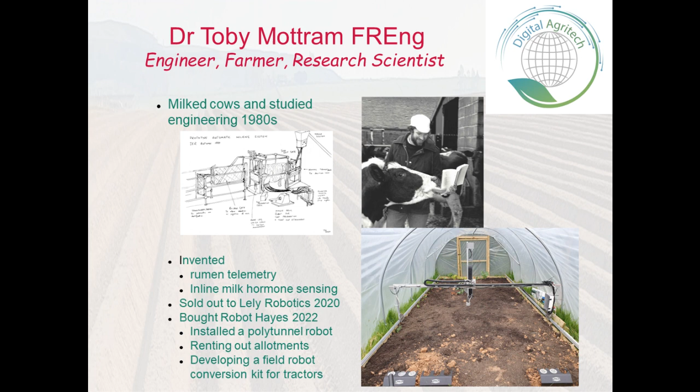So just to go back to the early days, I wrote the control software to get the cow in and out of the milking parlour, which was basically on an MS-DOS desktop machine with lots of wires, some gate sensors, and some strain gauges to measure the milk flow. Mike Street and his guys worked on a much faster Motorola platform to do the robot arm control, and we used to measure where the cow was in the station by an LVDT.

So it was all very analog, but it worked, and we sold that on to De Laval, and they went away and commercialized it from about 1997.

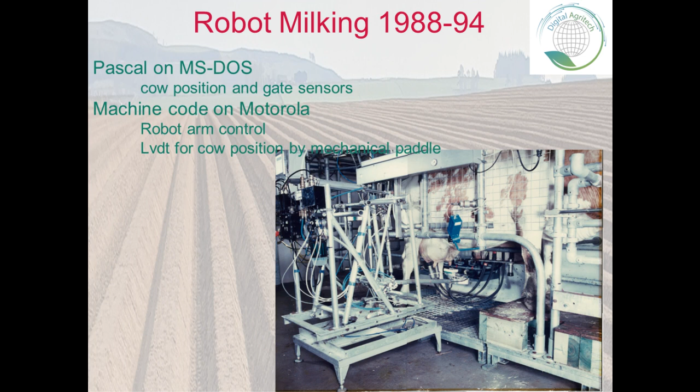One of the things worth remembering is that it takes, in effect, 10 years to get a complex product from an idea to market. And even now, 25, 30 years on since they launched it, there's still only about 10% of the cows in the world being milked by robot. The rest are still in very conventional systems, and there's still millions milked by hand. So the penetration is coming, and it's a big market, but it takes a while for farmers to change sometimes.

Then I moved into cow health monitoring, and I was actually rung up in the late 90s by a well-known company called Pfizer, who aren't in agriculture anymore, but they had some new product that was going to change the pH of the cow, because for years the vets had been saying the pH in the stomach is low and the cows are ill and it's a problem.

So we built a little wireless IC. In those days it was pretty large actually, about 30 millimeters across, but we managed to get that down a cow's throat. Later on we got much smaller ones. This batch you can see is actually the last batch I made in 2021 before I sold the company, and that transmitted at 433 megahertz with a very simple protocol.

We had a USB receiver, which we started off with a laptop, and then somewhere around about 2007 we thought, hold on, we can do this on a phone. So there was a lot of Java coding, and one of my student helpers there was actually downloading data off a cow, and that's how it worked.

But it was always going to be a research organization thing, because what we proved very quickly was that the rumen pH goes up and down like a yo-yo depending on what the cow's being fed. And yes, you can affect it by feeding, but almost all of it was down to the humans involved in feeding the cows, not in the actual formulation of the rations. That was pretty well organized.

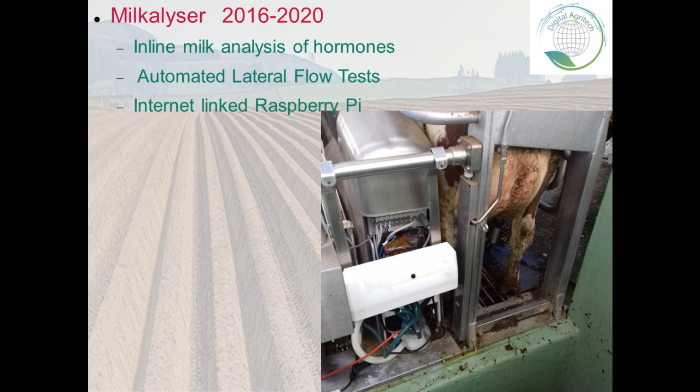In those days we used a Raspberry Pi, and I realized that the company who bought us out, Lely Robotics, one of the market leaders in robot milking, their head of development said, 'I like it, but I don't want to use a toy computer.' And I thought, oh God, here we go. Everything had to then be translated into a Windows-based system, and they put in a much more expensive camera, and then said, 'It's not cost effective.' So big companies don't always know as much as those at the front end.

Okay, so that's my whinges out of the way. Let's talk about the markets for agricultural software.

Well, obviously, government has had software for a long time, because they have to give out money and they need to record things. Also, big tech companies and supply chains - to be honest, I know nothing about that side, but I'm sure there's all the usual large company issues involved, legacy software and all the rest of it.

So let's talk about farm accounting. The first piece of software I saw on the farm was bought by my boss back in 1981 or 82, which was Farm Plan, an accounting software based on sales receipts and invoices.

It struggled because there's still many cash transactions in farming - you'll often go to some meet of farmers and there's a deal to be done, and they'll whip out a wallet full of £20 notes rather than do it through the books. That's one of the issues in farm accounting, but that's now pretty well understood, and half a dozen companies have that market stitched up.

What used to be frustrating though is the farm accounting never linked much to the farm management software, which in the early 80s - I was milking cows in Somerset as a herd manager - we used to record everything on paper sheets, then go down to the office and type it all in, and work out cow milk yields and so forth.

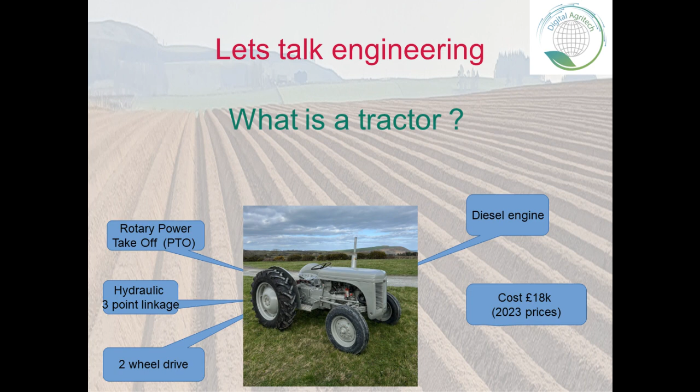4-wheel drive only really became popular in about the 70s and 80s, and now even small, cheap tractors are 4-wheel drive. The machine, actually, I think it cost about £500, which is £18,000 in today's prices. But now, moving on however many 70-odd years, you can now buy one manufactured in India - but not rubbish at all, it's a Yanmar company, built very well - costing almost half what they used to, but with a lot more features.

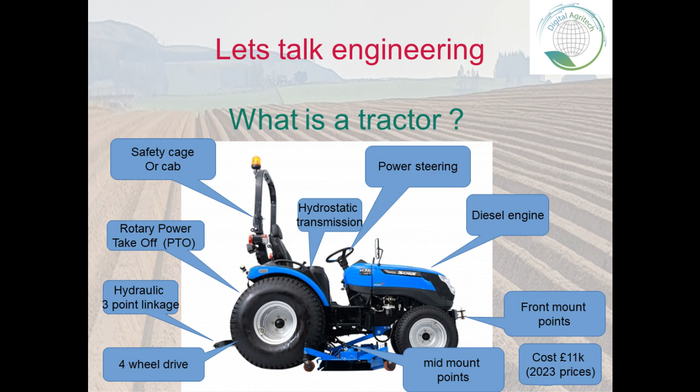Tractors were dangerous things, so they have to put cages and cabs on them. You've still got rotary power, but you've now got 2 hydraulic outputs up the back to provide pressurized oil to drive machines. You've got 4-wheel drive as standard, mid-mounting points for implements, front mounting points for implements, power steering, and, from my point of view, hydrostatic transmission - great, we just need to switch some valves to make the thing go faster and slower.

No one said a word. I'm quite happy to continue.

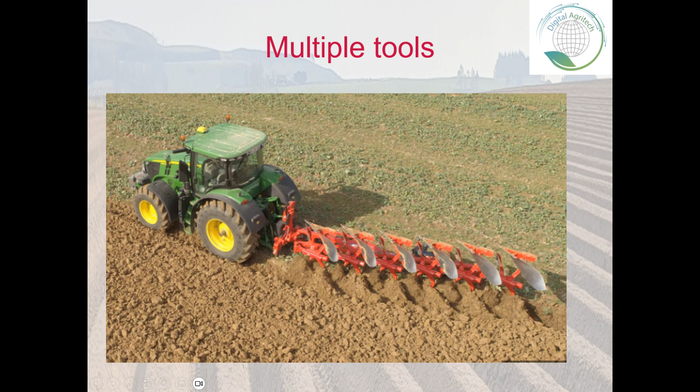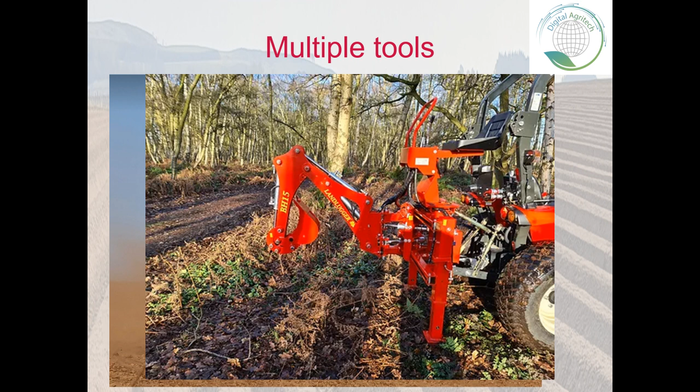Right, so let's talk about the tractor now as a digital machine. This has been creeping in gently over years. I think the big revelation was in '91 in the first Gulf War, when American tank commanders were buying GPS systems.

So that they could precisely locate themselves and call in airstrikes to exactly where the Air Force could find them—well, not find them, but find the other guys. And that in tractors has led to auto steer.

So you just set the thing to drive down a straight line that's coming from your precision location system, and more sophisticatedly now, at the end of the road the machine will actually say, okay, I've got to the end of the headland, and we'll just do a turn and come back down exactly in the correct line on the next set of passes.

But as you then get into other devices, you get into a thing we call the isobus, which is ultimately a CAN bus, but for agriculture. And that now has a feature called tractor implement management.

So let's say that seeder box that we were looking at, it says, oh, I'm sowing this particular seed, and the guide wheels need to turn at 3 meters a second or whatever some number is. So it then controls the speed of the tractor.

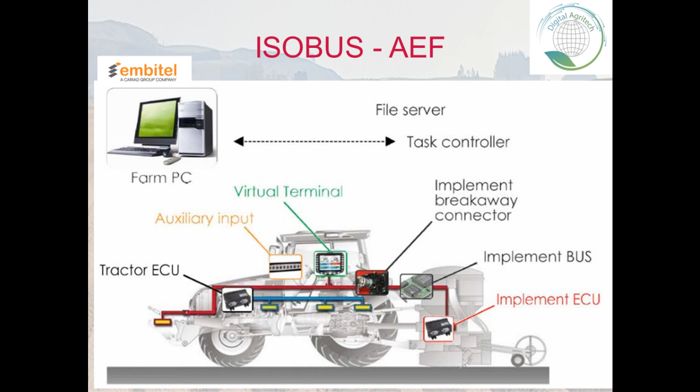And then each of these electronic implements - this is a seed box by the look of the drawing - you've got a bus inside with an electronic control unit, because for example, across this machine you might have a dozen seed boxes all releasing seeds, and they'll all be in electronic contact with the ECU. So that's the ISOBUS. It's a voluntary thing.

So now we're getting on to seriously smart implements. This is a machine called a RoboCrop, which is a hoeing machine for organic vegetable production. It's been developed by a couple of old friends of mine from Silsoe, and they sold the concept to Garford. So you can buy a RoboCrop from Garford.

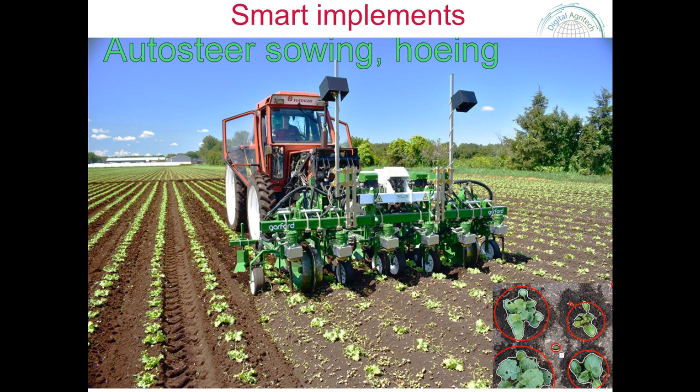And you think the military's got technology - hey, this is farming. So yeah, when the military starts shooting down missiles with lasers, you'll know, well, they copied it off a farm. But these machines, I have to admit, I've seen them working.

There's a hell of a lot of noise because they're running a couple of diesel generators to run all the servers that have to scan across maybe 4 meters, identifying all the plants, powering the lasers, zapping, and so on. So they move across the field at a slow walking pace, but no one wants to hand weed rocket, and weeds grow - they don't care what you're sowing, the weeds will be coming.

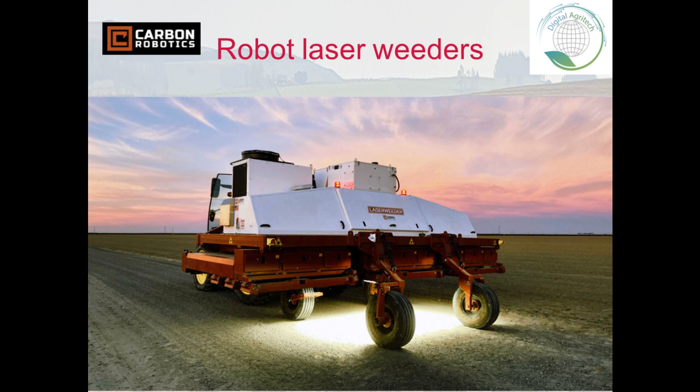So this is quite an interesting new development. There's a couple of companies - this is Carbon Robotics, there's another one called Helix. So yeah, you want to join those intelligent machines together.

So AEF organise what's called a plug fest, where they get everybody - tractor manufacturers, implement manufacturers - together, and it costs about €3,000 to be a member of AEF. So it's not something you do as a startup in the first week, but very quickly you need to be getting involved, and you can just buy the spec anyway - you don't have to go to one of these things to understand the plugs. But if you've got something new, and there will be lots of new stuff coming through, then you'll need to go to one of these and tell them, our data is formatted this way, and we have to do it that way because the only server that will run this technology is such-and-such, that type of thing. So there's a couple of these a year in Europe, and I think there's one in the States every year as well.

So let's move on to what people call autonomous tractors.

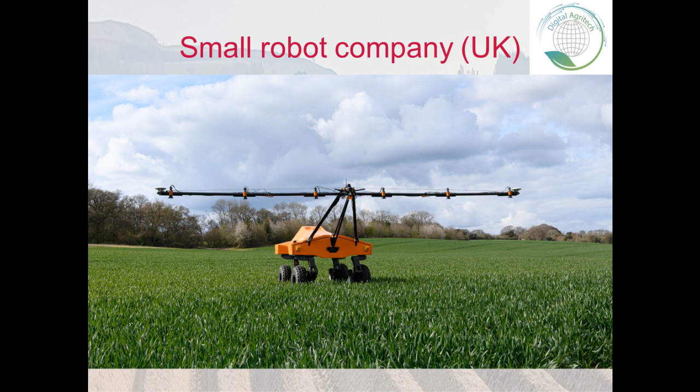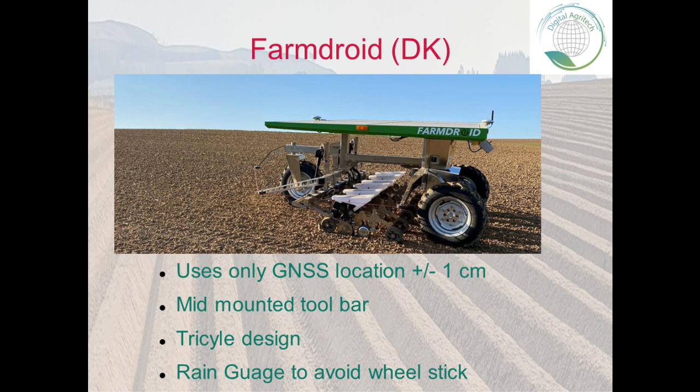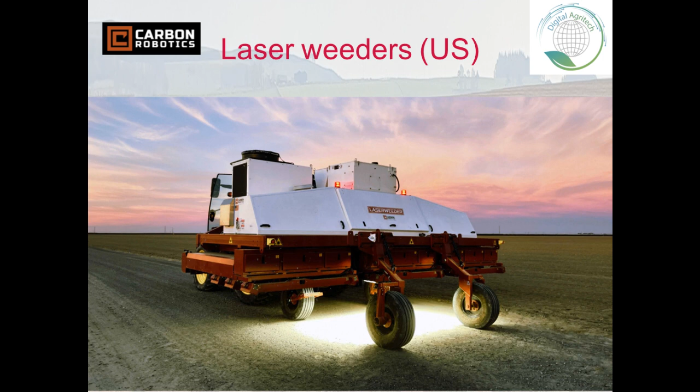The Carbon Robotics laser weeder comes either as something you put on the back of a big tractor, or it comes as self-propelled. I was talking in California, and these guys were saying the investors think it has to be an autonomous robot, whereas actually, once they get it stabilized, it's just another tool you put on the back of a tractor, which has already cost you £100,000. Why would you pay for someone to build another front end tractor just to drive this thing around? That's the logic of many farmers—I've already got a tractor which will do 10 things, why do I want a machine that costs $500,000 and only does one thing? We'll see how that pans out. But I still think the tractor has a huge future, as an autonomous style vehicle.

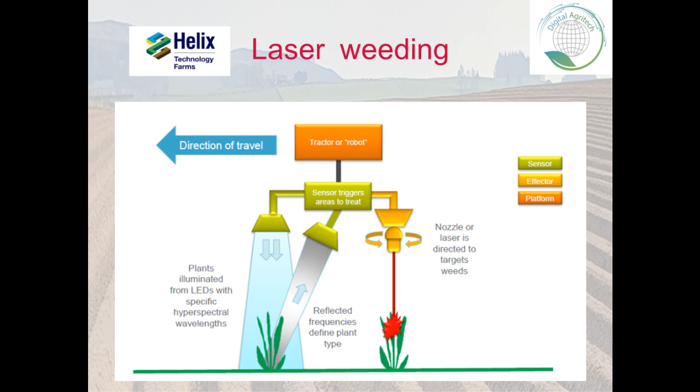So let's come on to some of the practical issues where you've actually got these. The point I'd make is these are very complex machines we're getting into. You've got navigation, machine control, software trying to identify plants, controls of lasers. So there's a lot of things that could go wrong.

They tend to be quite a niche machine. There's only so many people who produce asparagus in the UK, maybe 50. So if you're selling an asparagus picking robot, you haven't got a big market, and the nearest place you'd find someone else to do it would be a particular area of France, because these crops tend to be grown around the marketing distribution channels and particular soil types that grow a particular crop. So be aware of that - this might be a long way to the next group of farms who'd have one of these specialist machines. Rocket, again, is very much a North Italy type product.

You've got software interfaces which go via physical plugs. In my experience, if you're going to have an issue - oh, my machine's not working, what is it? - you're going to end up having to go around and test the physical plugs, because sooner or later you'll find someone's trodden on one while climbing over the machine, or it's been hit, or a piece of bird shit has landed on it. You've got all sorts of things that can go wrong with physical plugs. Unless you turn up on a farm and the machine's not working, you'll slowly find the machine's probably not being used in the way it was intended. Anyway, these things happen.

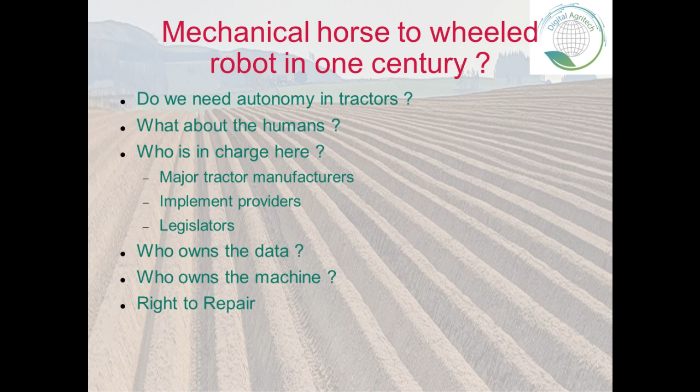Then we've got the issue of who owns the data and who owns the machine, and have you got a right to repair it when it breaks down? Have you a right to get into the software and hack it? Because farmers will do that.

And we've already run into serious issues in the States because John Deere said, no, if you don't pay the software license, the machine switches off, and that's that. So people then jumped up and down and said, that's the whole concept. You bought my tractor. Why should anybody else be able to stop you using it?

So already, and this is very hot news, there's 4 US states now in 2023 that have just enacted a right to repair, which basically means the right to get into the software, whether it's by an independent contractor or the farmer himself. So there's already 4 states, and it's specifically for farm machinery. So that's quite an interesting thing.

I don't know what our government's up to, but I think they're probably more interested in protecting Taylor Swift's digital rights than worrying about tractors. So a little bit of politics there, but hey.

Now, you asked about Internet of Things. This is one of the latest things from John Deere this year, is that up until now, you've used a USB stick to go around and set all the machines to be on the same page. They're now into what their latest piece of software is called Data Sync.

So let's say we've got 3 pea vining machines working in the east of Scotland this summer, all synced together through this new Data Sync software, which will tell them what each machine is doing, where it is at any given time, so that at least they'll avoid colliding with each other. Mostly they're actually just recording the amount of peas they got on board and calling up the trucks to take it away. But that's where we're going with this, is total sync and integration.

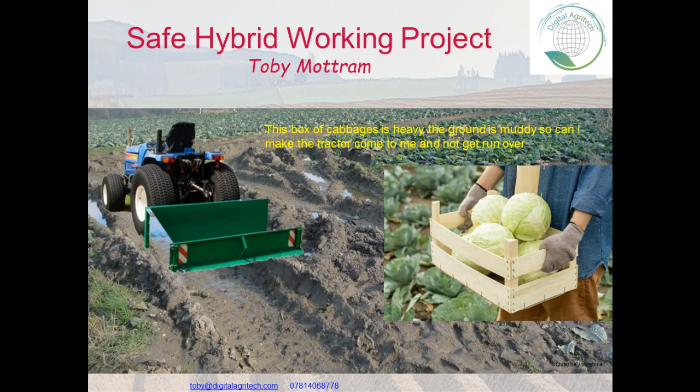So I'll just slip back tonight. There you go, you've got a hand up from Martin who wants to ask a question by the look of it. Sure.

So you're covering the safety aspects to do with people not being mown down when they're walking in front of something, or animals. I was just wondering about the employment aspects. With other walks of life we're concerned now - will technology put us all out of work, or will it mean we're freed up to do other things? So I was wondering how that works in this question of farm automation, the extent to which these newer machines will replace people on farms, or whether people will still be needed to do other tasks.

Well, I think this is the dilemma. From the defensive side of the agriculture industry, we can't recruit enough people. There was a shortage of herdsmen - that's why we invented robot milking. It was seen as an existential threat for the UK dairy industry - no one wants to milk cows. Then we ended up with 20,000 Poles coming to milk cows for a few years, but they've gone home now. We still need people to milk cows.

So there's always been a shortage of people, particularly for skilled manual work - picking fruit, lifting cabbages. There's a lot of RSI. People don't really want to do it, and they're not desperate enough that they'll do it just because they need the money. Some of these areas have had really anti-immigrant sentiment - they're taking all our jobs. But when the Poles disappeared and went home, and the farmers said come and pick our crops, people said, oh no, I don't want to do that. Why can't you get someone else to do that?